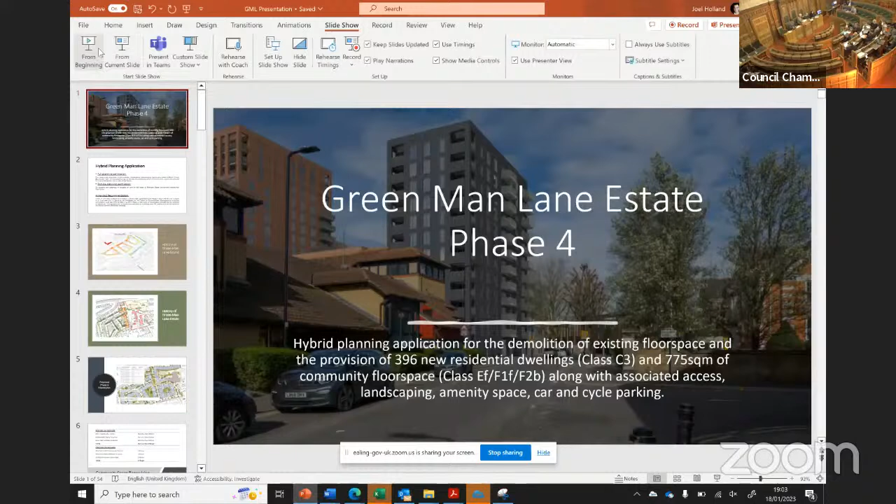Good evening, members. I present to you this evening a hybrid planning application for the redevelopment of Phase 4 of the Green Man Lane estate. A hybrid planning application is an application that constitutes development consisting of both full details and outline elements. With this in mind, full details have been submitted for the construction of 2 blocks ranging in height from 5 to 16 storeys to accommodate 396 units and community use space on the ground floor of blocks D3 and C4. Outline planning permission is sought for the creation of community use space on the land to the west of Romsey Road.

This phase represents the final phase of the Green Man Lane estate development, with Phase 6 currently under construction. Members of the committee should also be aware of the amended recommendation contained within the briefing note to reflect the likely design changes that will be necessary to address new fire safety regulations for buildings over 30 metres. The implications of these changes have been outlined within the briefing note and will be addressed within this presentation.

Planning permission was first given in 2010 for the redevelopment of Green Man Lane Estate. The estate originally accommodated 464 units, and the original permission proposed 706 residential units. The image shown reflects one of the parameter plans for the estate, with heights for phase 4 generally ranging from 6 to 9 storeys. If you can follow my cursor, I'm generally circling the location of phase 4 on this particular plan.

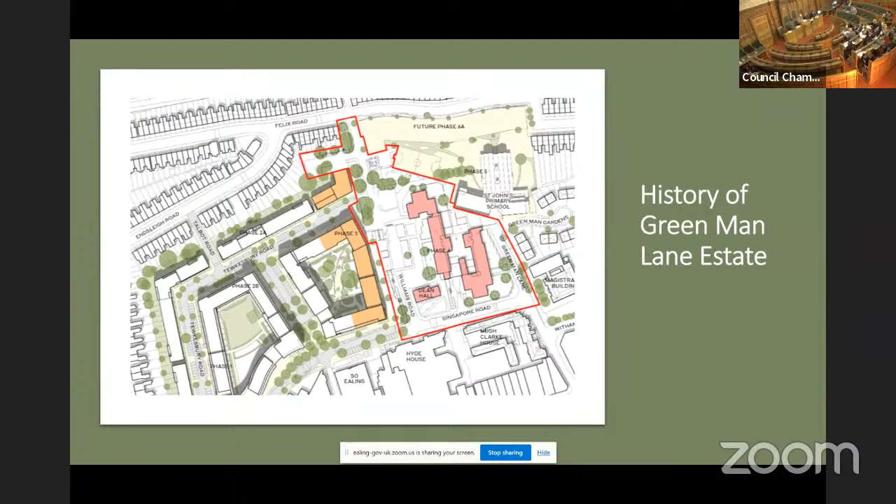Since the approval of these permissions, the emerging pattern of development has evolved and involved the approval of and construction of taller buildings within the vicinity of the application site. Therefore, the site presents the opportunity to optimise the site to deliver housing, including affordable housing, in a desirable and central location close to services, amenities, and public transport.

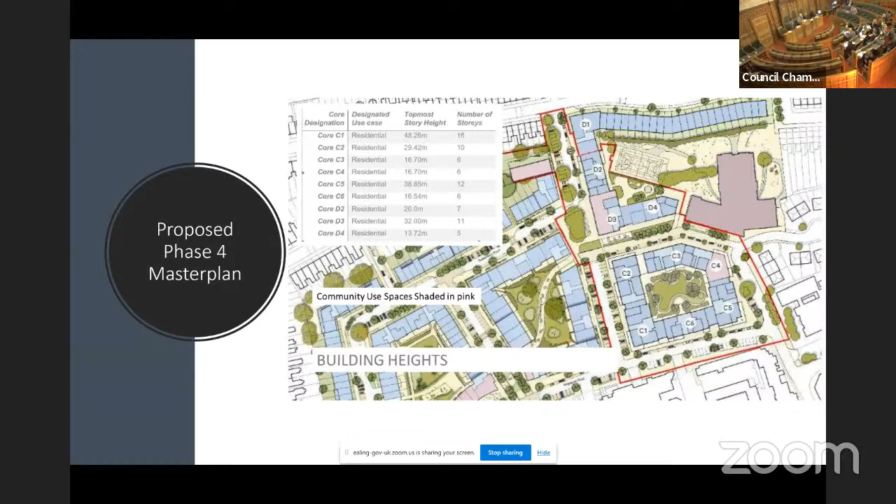Part of the original permission required the reprovision of community space within the estate, which included the Green Man Lane Community Centre, Jubilee Hall Children's Centre, and Dean Hall. The community centre is currently housed within a temporary structure on the estate. Jubilee Hall Children's Centre is also in a temporary structure in Drayton Green, and Dean Hall is proposed to be demolished and currently exists on the site.

The proposal would ultimately result in an uplift in community floor space, complying with both the original permission and current planning policy with respect to social infrastructure.

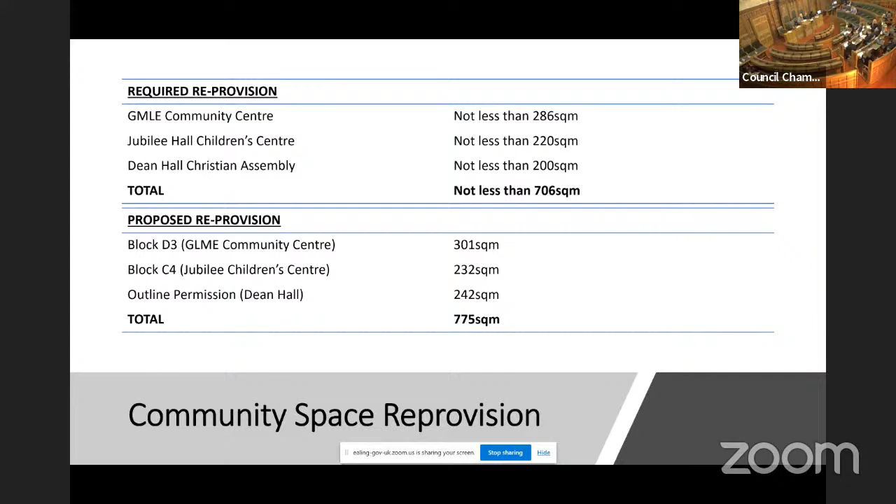The outline part of the application refers to the reprovision of Dean Hall within the site. The exact design and form of the proposed community space is not yet known, and therefore all matters in respect to this application are reserved, and we require the submission of a reserved matters application. This outline permission would nevertheless secure the reprovision of Dean Hall.

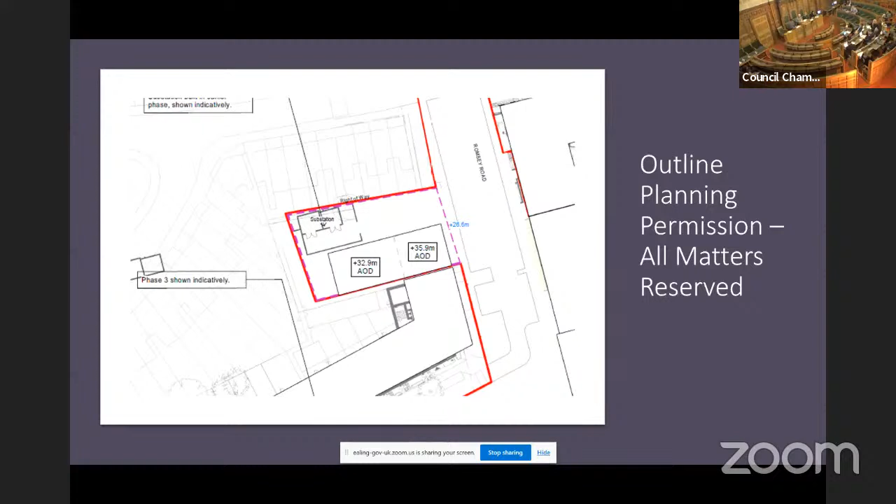Part B of Policy D9 of the London Plan, as well as Ealing Council's draft local plan, outline that tall buildings should be located on allocated development sites within the borough. Whilst the proposal is not strictly in accordance with this requirement, a townscape and visual impact assessment has been carried out in accordance with Part C of Policy D9.

This assessment includes short, long, and medium range views of the development and has been scrutinised by council officers and the Greater London Authority. The site was also involved in a comprehensive pre-application process and consideration by a design review panel. The design of the buildings themselves show a good amount of variation and articulation within their design.

With the use of both projecting and inset balconies, different brick tones within each of the blocks, and defined bases, middle, and tops on the higher elements of the scheme.

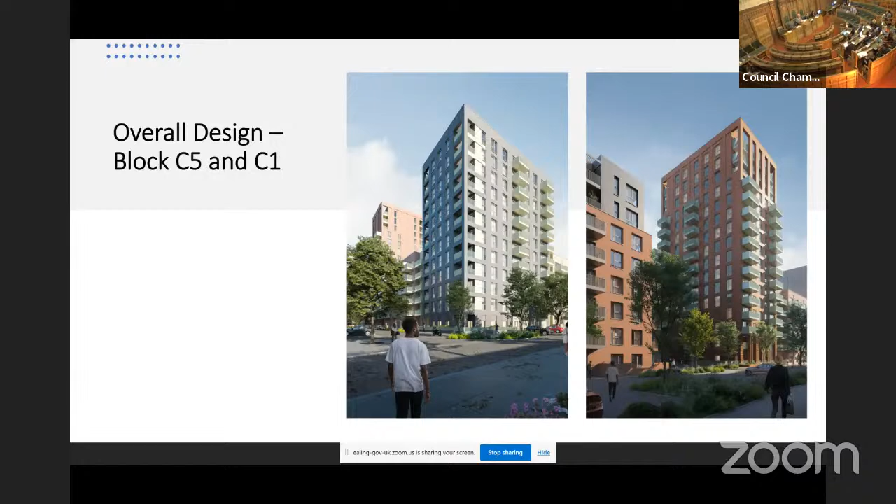At the same time, the overall design of the proposed development shares consistency with the overall appearance of the other earlier stages of the Green Man Lane estate. The results of the assessment show that whilst the building would be a prominent addition to the West Ealing townscape, the proposal would be consistent with the emerging character of West Ealing.

The design of the proposed building is also considered to be of high quality, adopting the requirements of London Plan Policy and the Council's housing design guidance with respect to tall buildings.

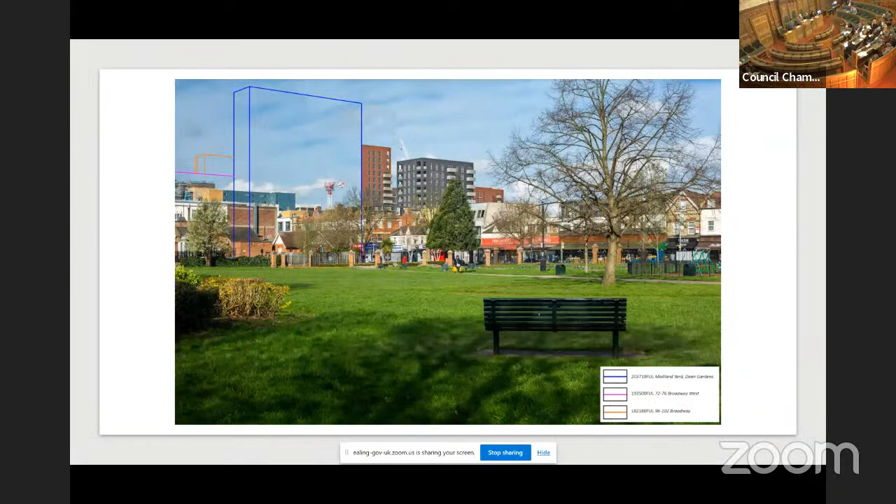So the images on your screen now are showing the existing situation if we're standing towards the centre of Dean Gardens and what it would look like with no other development occurring. And this is the emerging context showing consented schemes within the area. The Maitland Yard, obviously partially under construction, as we saw on the site visit.

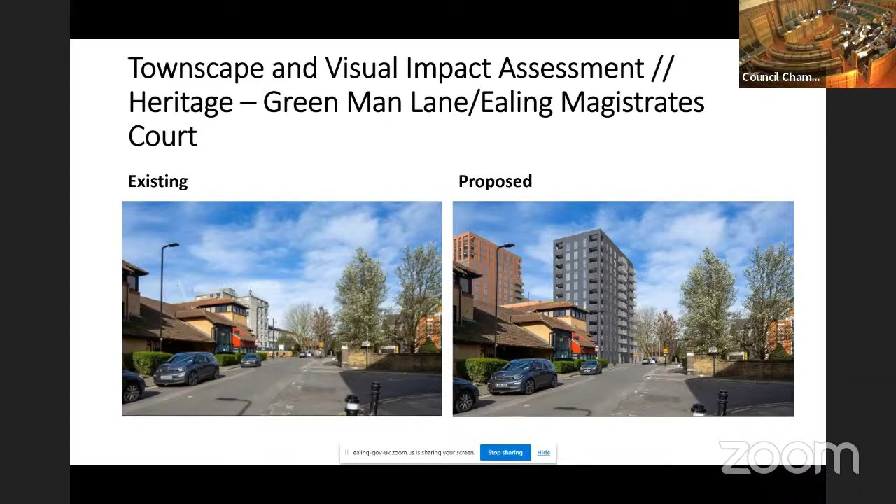The townscape assessment also includes views from designated heritage assets, as well as the Ealing Magistrates Court, which is a local heritage asset. These were also scrutinised, and the proposed development was considered to constitute less than substantial harm in accordance with NPPF tests, with the public benefits of the proposal significantly outweighing any harm.

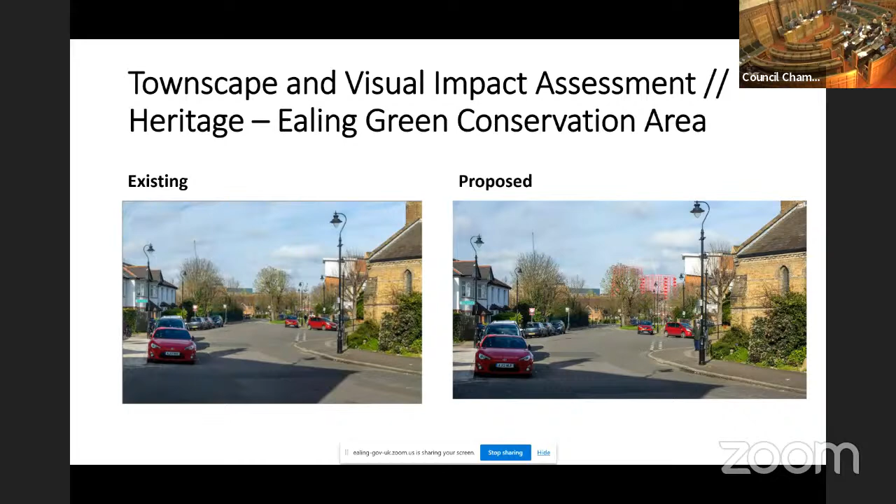Here's another view from the Ealing Green Conservation Area on Mattock Lane with St John's Church to the right. This again shows the site as existing, the view towards West Ealing under current circumstances, and then again within the emerging context of the area.

The development would provide a good mix of housing across the estate. Whilst tenures would be split into separate blocks, there would be no architectural distinction between different housing tenures, ensuring that development would provide for a cohesive and inclusive community. The original estate had 464 homes.

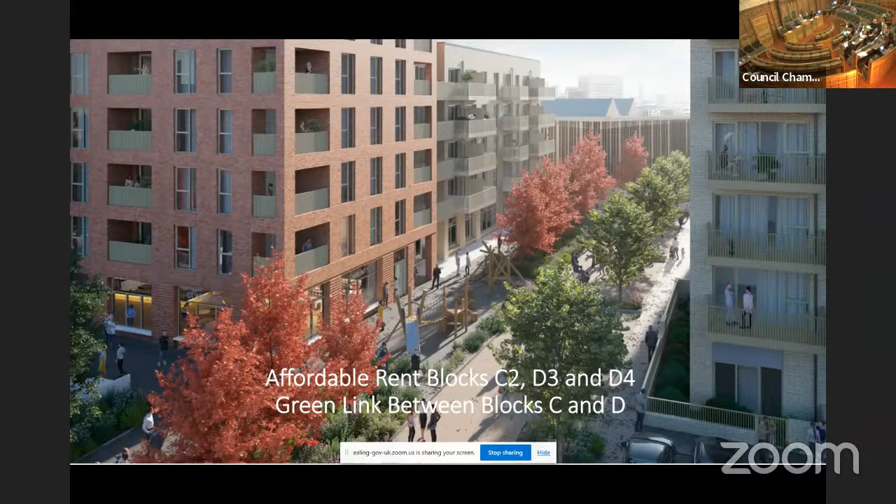However, the original housing stock was skewed heavily in favour of one-bedroom homes. On an estate-wide basis, whilst the proposal will result in a loss of number of units within social rent tenure, there will be an overall uplift in floor space within social rent, which is compliant with Policy H8 of the London Plan. This policy requires that the loss of existing housing should be replaced by new housing at existing or higher densities with at least the equivalent level of floor space. As you can see on those two tables, the areas in bold show that increase.

In terms of the affordable housing provision within this phase alone, the proposal will deliver a total of 183 homes, with a mix of types of housing, including family housing. There will be 129 homes within the affordable rent tenure and 54 within shared ownership. This represents a tenure split of 70% affordable rent and 30% shared ownership. This is considered to be a good quality housing offer.

It's also consistent with both the current Ealing Development Management DPD as well as the draft local plan. The development also provides housing that's compliant with internal space standards and private amenity space standards.

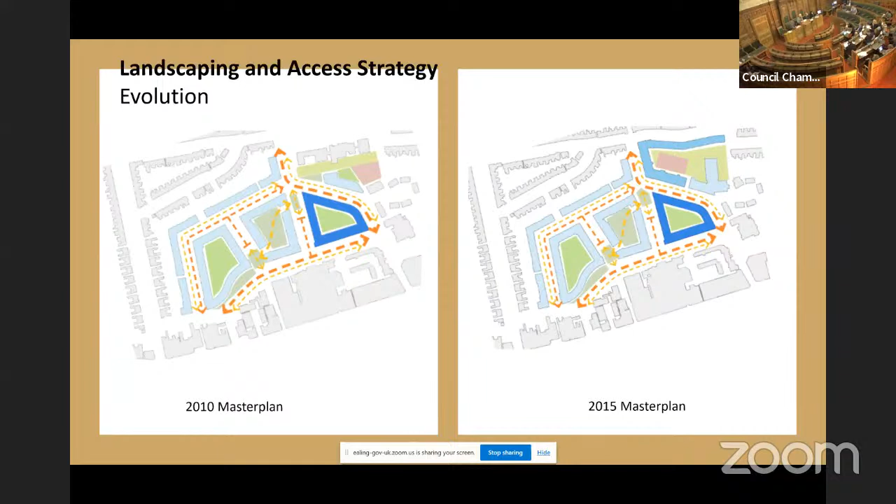The proposal also represents a significant improvement to the access strategy of the original master plan. Original versions showed a vehicular connection from Green Man Lane up to Felix Road, which overemphasised private motor vehicle use. The revised access strategy significantly improves accessibility throughout the site by connecting existing and proposed communal spaces of the various stages of the development, and creates a green link throughout the site centred around a central square framed by proposed buildings rather than roads.

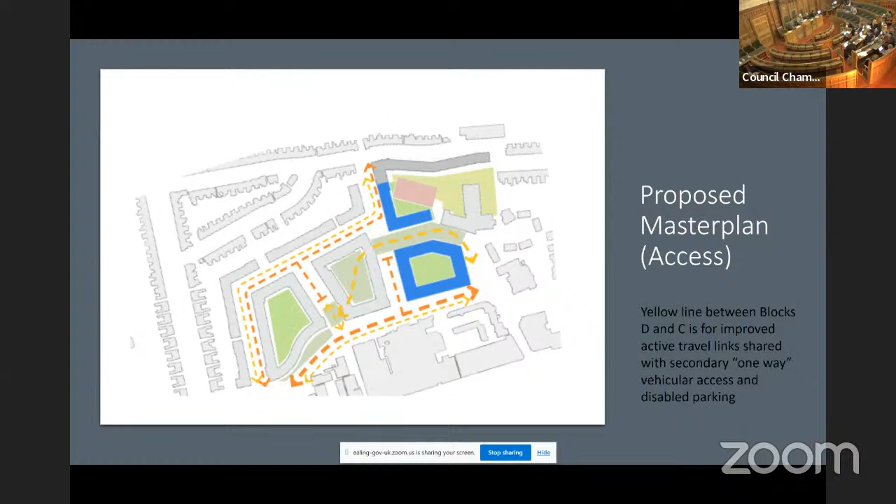Council officers and GLA are very supportive of this revised strategy.

Communal space and public realm would also be integrated into the development, which includes a public square adjoining the community space within Block D3, as well as spaces within each block for residents, so communal amenity space.

Children's play space will be integrated well into the development, catering for both younger and older age groups from 0 to 15 years old. Whilst there are shortfalls within the scheme, as outlined by Policy 7D, the spaces and play space would be fit for purpose, and shortfalls will be made up through financial contributions to local parks and play facilities.

Energy matters have been addressed within the committee report, which includes a requirement for a decarbonisation strategy within the blocks to adopt additional sustainable energy measures to reduce carbon emissions when options for these become available.

This is the central courtyard of Block C, showing children's play space and the amenity space.

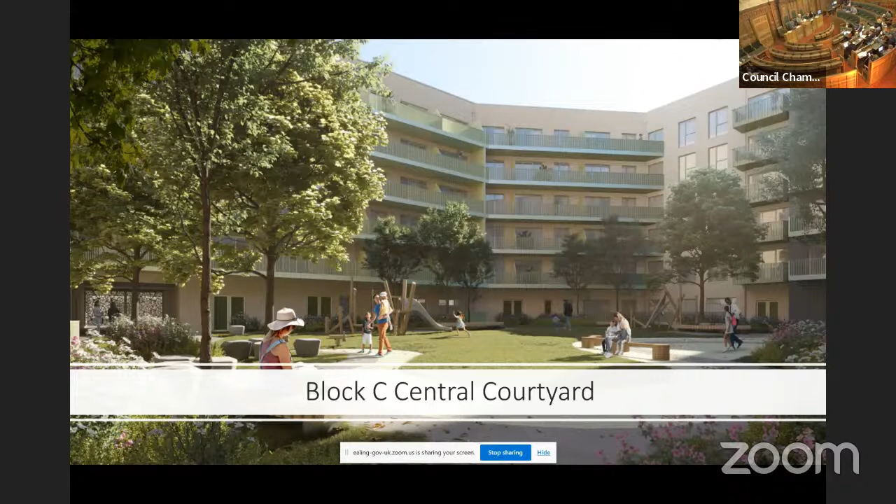Transport matters have also been reviewed within the report with respect to car parking provision and cycle parking. Whilst TfL have raised some concerns with the amount of car parking, the development needs to accommodate existing residents that may have the benefit of an existing resident parking permit. Further details will be required in the allocation of these spaces and within the development, and measures to reduce car parking spaces where demand no longer exists.

The proposal would also not compromise the delivery of the West Ealing Livable Neighbourhoods project, which is at an early design stage within council.

As was detailed on the site visit and outlined within the briefing note, the government is undertaking consultation on a proposal requiring all buildings above 30 metres in height to provide 2 staircases, which was announced on 23rd of December 2022, in addition to fire safety lift requirements. This requirement has also been adopted by the Mayor of London.

Whilst fire safety matters are generally reserved for building regulations, fire matters are also required to be assessed through planning policy, including the submission of a fire statement and referral to the London Fire Brigade and Health and Safety Executive. In this instance, such a requirement for a staircase has the potential to affect the layout of the building as it is currently presented, and is accordingly a land use and planning matter.

As a result of this new change, council officers requested the applicant undertake an exercise to ensure that the new regulations for a second staircase can be reasonably implemented within the scheme without having a material impact on the proposal as it currently stands. As such, the proposal has some impact on the scheme as presented, and the new regulation will only affect blocks C1, C5 and D3, as those blocks are the ones that exceed 30 metres in height.

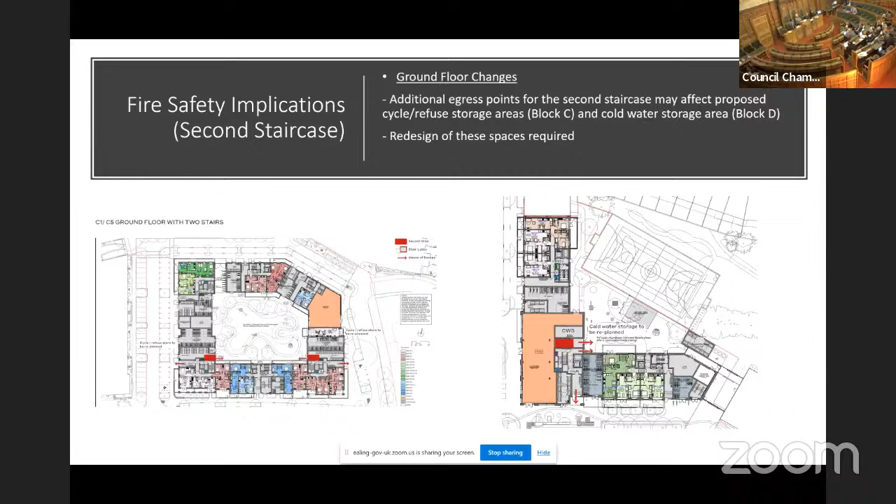As we move up the scheme, we can see on the left-hand side the proposal as is currently presented and an option for providing that second staircase. On both blocks C1 and C5, the flats that are affected are these particular flats here. These are 2-bedroom flats, and in order to accommodate this secondary staircase, this would need to become a 1-bedroom flat.

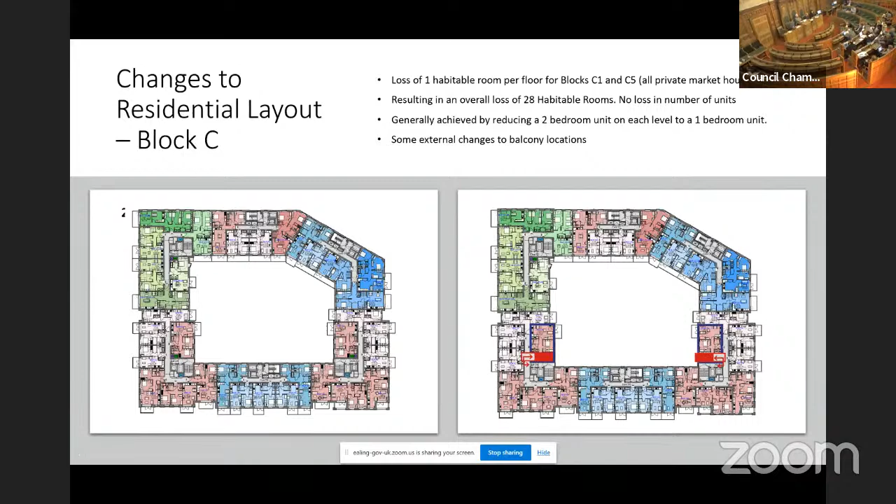Similarly, on the 10th floor, it's a similar process, and the 2-bedroom flats would need to be amended to 1-bedroom flats.

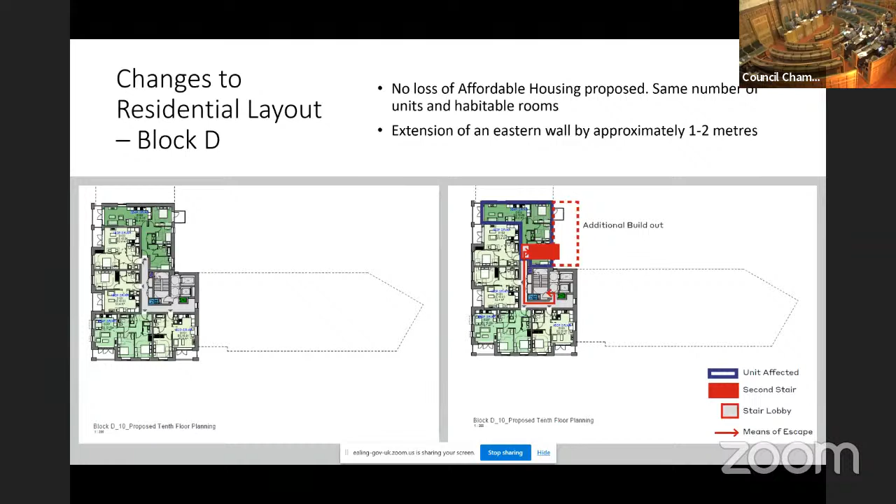As we go to Block D, an alternative is proposed, effectively increasing one of the eastern walls of Block D to accommodate a secondary staircase in the footprint of a proposed 3-bedroom flat. To make up for the loss of floor space, this wall would need to be slightly extended by between 1 or 2 meters to continue to accommodate a 3-bedroom home with an affordable rent tenure.

As a summary of the implications, there's no loss of affordable housing in comparison to what we are presenting to you this evening, and no loss in the number of units. However, there'll be a loss of 28 habitable rooms within private market housing. This means that if this scheme were delivered as presented now, affordable housing provision by habitable room could potentially increase from 49% to 50%. Changes to comply with these new fire regulations would be considered non-material in nature.

As a summary of the potential changes in housing mix, the current submission shows a scheme in favour of 2-bedroom units. With the change required, 2-bedroom flats would become 1-bedroom flats, and therefore the proportion of 1-bedroom flats has increased while the proportion of 2-bedroom flats has decreased.

In conclusion, the site represents good design in a desirable and central location close to services, amenities and public transport. The scheme results in an uplift in the number of units compared to the original consented scheme, an uplift in heights, and a different site layout. However, it is considered these factors have been adequately justified.

Accordingly, the officer recommendation for the committee is to grant the principle of development subject to conditions, legal agreement and stage 2 referral, with the final decision delegated to the head of development management in consultation with the chair of planning committee, to resolve matters relating to the new fire safety regulations for a second staircase within buildings over 30 metres. This would be on the basis there would be no loss of agreed affordable housing.

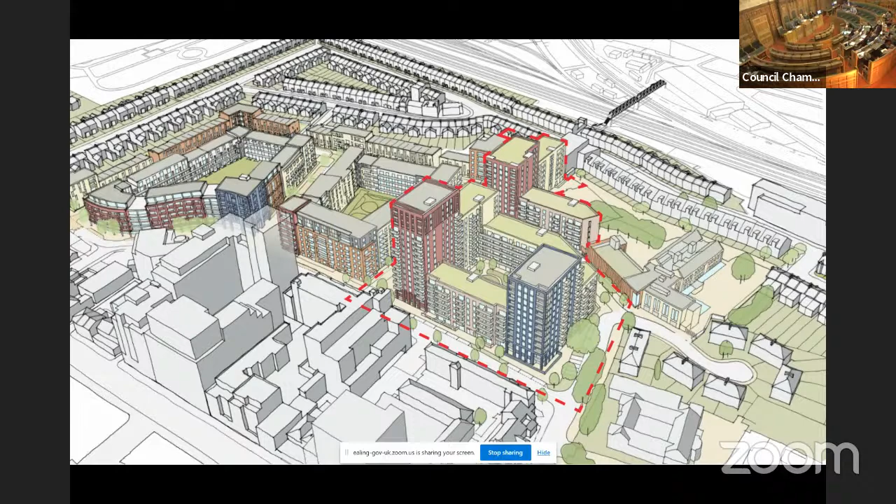The affordable housing units I've mentioned previously remain unchanged if that second staircase gets implemented. It's only the private market housing affected. Going back to this slide, which summarises the whole estate, effectively 28 units would reduce from 2-bedroom to 1-bedroom, but these would be private market housing. Affordable housing would remain unchanged.

Councillor Nund on daylight and sunlight. With schemes like this, very large scale schemes of 396 units, testing every single window isn't really possible, so the appropriate process is to take a cross section. When we say 47% don't comply, that doesn't mean it's detrimental - often it's just a minor deviation from the guidance, and it is just guidance. It gives an indication of the quality of the spaces proposed. Where it doesn't comply, and 47% seems quite high, these non-compliance areas are in very small instances, and the points tested were potentially the worst case scenario, not the best ones.

On pick up and drop off, no loading bay is proposed, but I understand that's the case through Green Man Lane as it currently is. Let me go back to this image here.

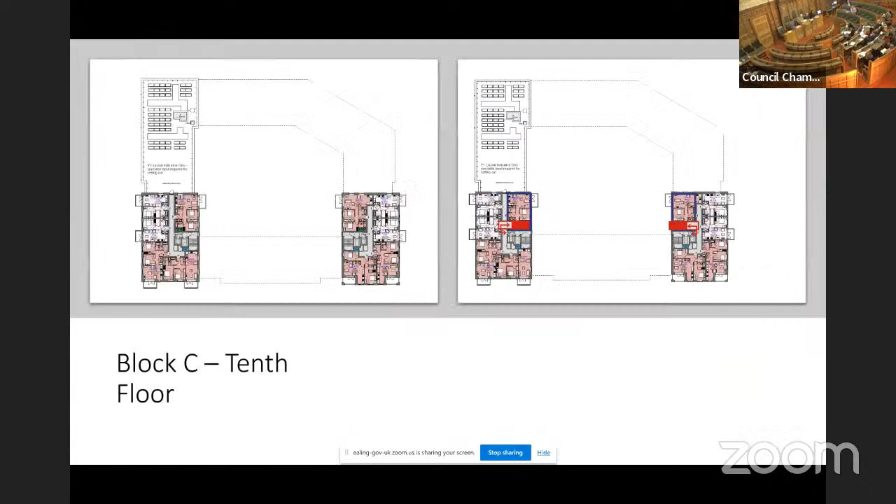Sorry, just on that - are you saying the disabled bays are doubling up as a drop-off pickup? No, they would most likely stop within that particular single lane carriageway. Okay, just making sure that's clear.

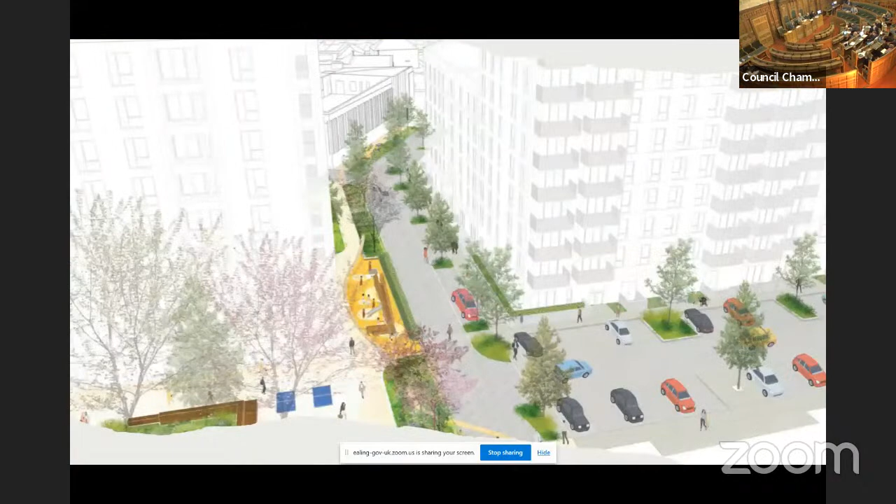Councillor Kumar: Thank you, Chair. My question is on - I know it was a bit fast, correct me if I've got it wrong - you mentioned resident permit, how is that going to work? I saw the cars on the plan, and you said those are disabled bays. So I need clarification on what you meant, considering there is demand for parking in that area, how would this resident permit thing work? And my other question was on fire and water storage - you addressed the fire thing.

What's brought about the redesigning? Was there anything specific, or was it a bigger problem? It'd be good to know. Thank you.

On the site visit, we did talk quite a lot about why the fire changes happened, and I note that you weren't there, so yeah, it's a fair question - we should probably have brought that up tonight so that the whole committee knows. That's a fair question. So start at the top, please.

The antisocial behaviour - the first question. So the way I take this question is the concern that there's existing antisocial behaviour, and the space being open could encourage more. These matters are addressed through what we referred to before as the secure by design standards, undertaken with the Metropolitan Police. So there are aspects that discourage that, built into the built environment. Those intricate details of how we could discourage antisocial behaviour within the estate would be subject to that. Obviously, the planning system can't control the behaviour of people, but we can try wherever possible to design out opportunities for antisocial behaviour to occur.

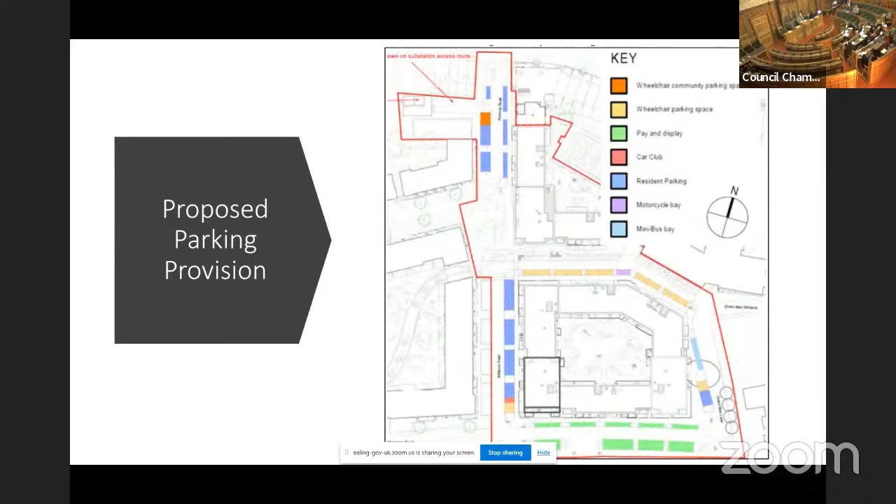But also going back to another point, which I've found in a lot of applications, is that the provision generally for play areas is compromised every time. We need to consider and focus on wanting more play area for residents. By just compromising and putting money into building other existing play areas, that's actually just putting more strain. So I think in future, not this application, but we should be mindful of what comes forward to committee. Thank you.

Okay, Councillor Brett next. I'll just urge the committee not to repeat what's already been said, if they can - I'm not saying you're going to, I'm just saying. I was actually going to withdraw because the councillor has already kind of said what I wanted to say. Sorry, I wasn't jumping the gun there. I was just mindful of that, okay, thank you for that.

Councillor Gordon. Thank you, Chair. So if I need to declare, I've been the ward councillor for Elthorne, now Hanwell Broadway, covering the Green Man Lane estate since 2010. So I've seen the estate completely redeveloped, and I think we need to see this application in that context, that we have several phases which have hugely enhanced West Ealing, and more importantly, enhanced the lives of residents. And I see this as the next block. So I would very much welcome it, notwithstanding there are one or two issues with the development.

Also just to put in context what it is going to replace - Tinton Court, which is as poor a bit of social housing as you can get anywhere. It's been the magnet for virtually all the antisocial behaviour in the ward, appalling living conditions, appalling levels of maintenance. So I think we heartily welcome the demolition of the existing buildings. Anything will be better, but I think this will be significantly better. So I do welcome it.